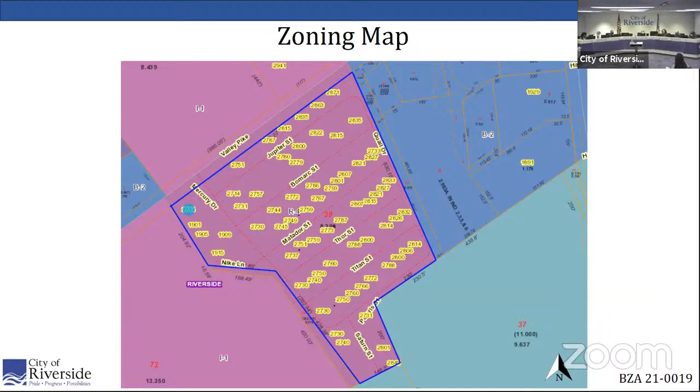This is the zoning map, and this is where the fence will be constructed. It is in the R4 multifamily zoning district. Here is the aerial map. Again, this is where the fence will be constructed. The subject site is in blue.

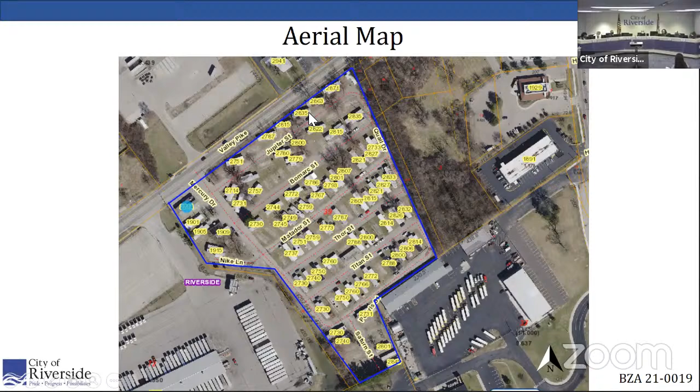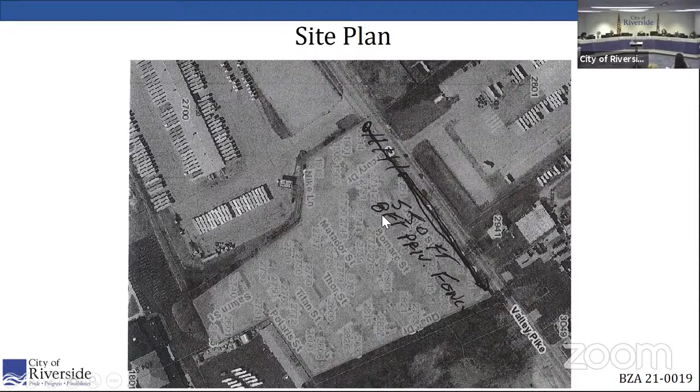The second standard for approval is whether the variance is substantial, and that is yes to both variances. The first variance is a 100% encroachment into the front yard, and the second one is a 166% increase of the permitted fence height.

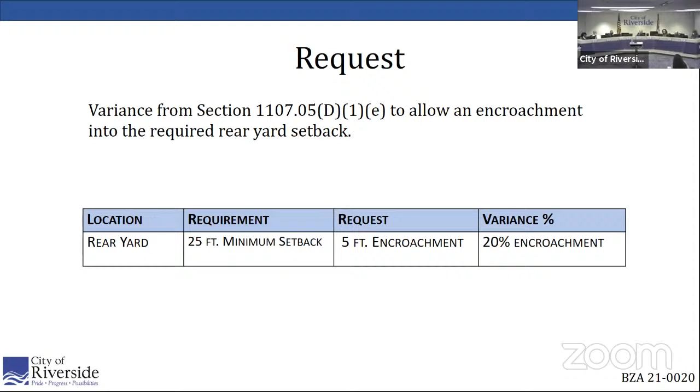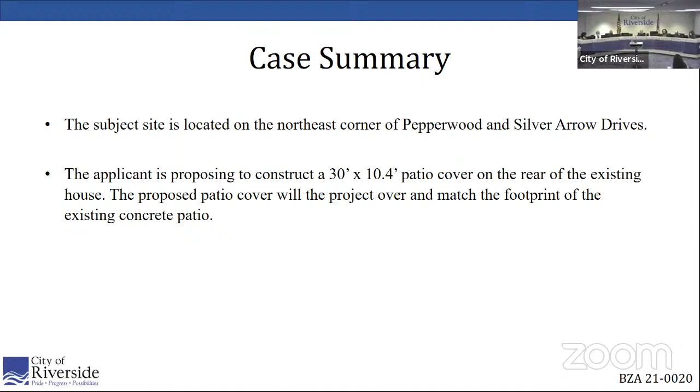We now hear case number BZA 21-0020, Pepperwood variance. City, want to tell us what's going on? This is a variance request from section 1107.05 to allow an encroachment into the required rear yard setback. The requirement is 25 feet, and the request is a 5-foot encroachment. The subject site is located on the corner of Pepperwood and Silver Arrow Drives. They're proposing to construct a patio cover on the existing house. The proposed cover will project over the concrete patio that's already there. Here's the zoning map; it is in the R3 medium density zoning district. The subject site is outlined in blue.

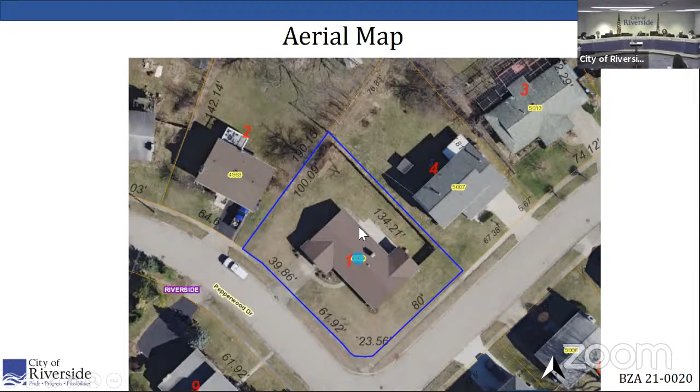Here is the aerial photo of the subject site, and this is where the proposed patio cover will go. This is the site plan. Again, you can see where the proposed patio cover will go in the setback.

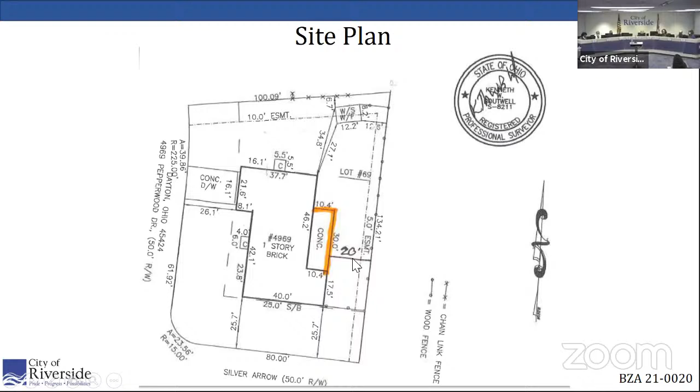The applicant could have beneficial use of the property. However, we acknowledge the property will yield a greater return and more use for the applicant with the patio cover. This is a substantial variance as it is a 20% encroachment.

The character of the neighborhood would not be substantially altered, nor will any other properties suffer any damage as a result of the variance. The delivery of government services will not be impacted by the proposed variance.

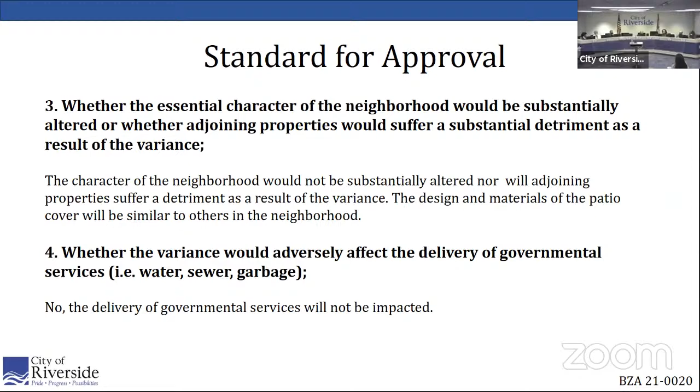Staff does not have enough information regarding the applicant's knowledge at the time the home was purchased. And for the sixth standard for approval, whether the property owner's predicament can be alleviated through some other method, the answer is no. The variance is required to allow the patio cover to match the existing footprint of the patio that's there.

Finally, yes, this variance request does meet the spirit and intent of the code. It's already meeting the required side yard setbacks and will match the existing home and the character of the neighborhood. Staff finds that the requested variance for the rear yard setback is adequately justified and meets the standards for approval, and recommends approval of this variance.

These are your required actions to approve or deny based on the information in the staff report and any testimony and evidence provided today. Again, reminding you of what the variance is being requested. Are there any questions for me?

Okay. At 7:34 we'll open the public portion. Is there anyone here who would like to speak in favor of the application?

I'm Ronald Rybold, the owner of 4969 Pepperwood. I purchased the property, I believe, in April.

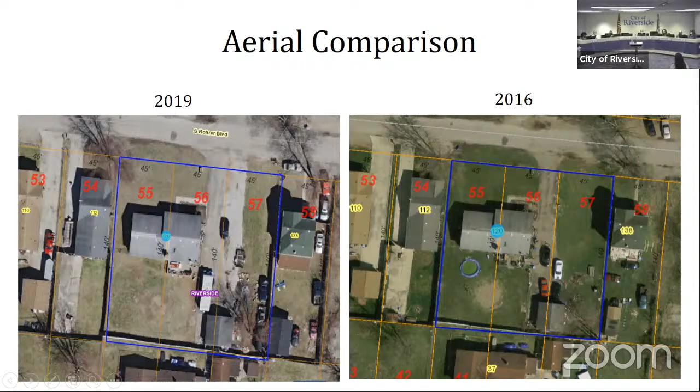Here is the zoning map. The subject site is outlined in blue, and you can see it covers three parcels. They are not combined, and it is in the R3 medium density zoning district. Here is an aerial comparison: the 2019 aerial, the most current one we have, and an aerial from 2016. Here is the site plan that was submitted with the appeal application.

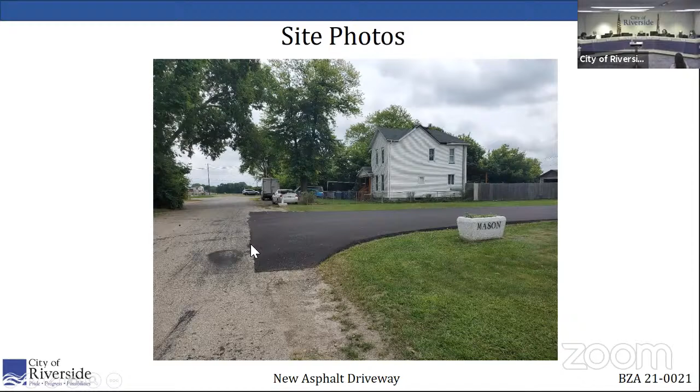This is the site plan that was submitted with the zoning permit. These are the site photos of the front of the subject site. This is the new driveway that was poured. It should be noted that this is where the right-of-way starts, right here. Here's another view of the driveway, a street view from Google 2015, and here is one from our engineering technician on July 6th.

Staff finds that the driveway that was put in exceeds all of the dimension requirements we have in section 1113.13. The maximum width is 30 feet, and when it meets the public right-of-way, it has to narrow down to 24 feet, then it can come back out again in the apron to 30 feet. So it's 30, 24, 30. That driveway is over 33 feet in the right-of-way and on the private property, and the apron is over 51.

The current aerials we have show that there was an expansion between 2016 and 2019, and we don't have any records of a permit when that original expansion happened. So any further expansion loses any non-conforming rights that would have been there on the property.

We find that the applicant knowingly paved the driveway and apron with no valid right-of-way or zoning permit, and they were informed by the service department that the areas marked to be paved were not in compliance. There's sufficient evidence that the applicant knew the driveway was not in compliance and that he completed the work without approved permits. Neither the applicant nor the contractor had received permit approvals for the work done. The service department and zoning staff made the correct decision to deny the permits because the applicant and the contractor knowingly completed the driveway and apron in violation of the UDO.

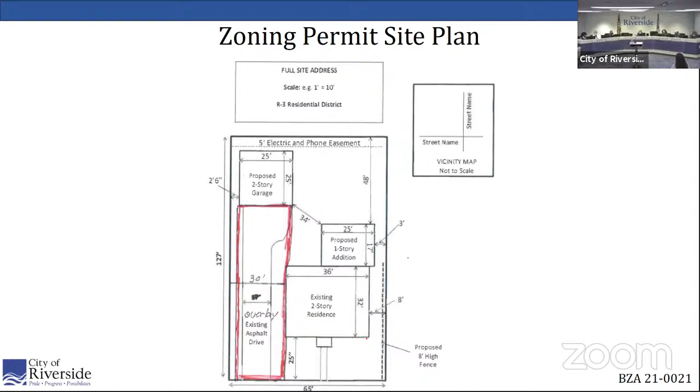Okay, hold on. Is this what you're referring to? Yeah, bring the driveway into compliance. What does that mean?

So when we spoke, a permitted driveway can be 30 feet on private property, and then when it meets the right of way, it can narrow down to 24, and then when it goes to the apron, the maximum width for that is 30 again. So that would be bringing it into compliance.

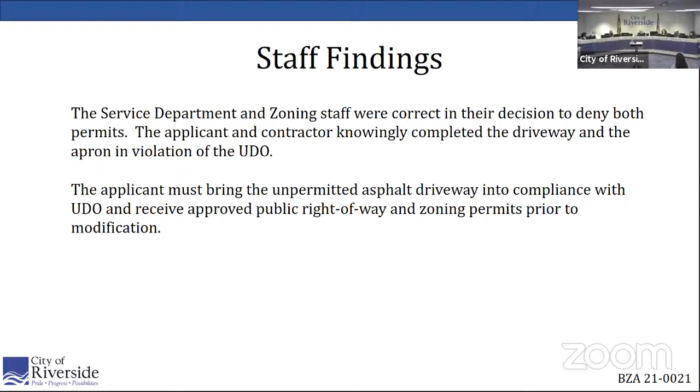Is there an apron? There is. Perhaps you can point that out in one of those photos. So when we say apron, we're talking about this section here. Okay, gotcha.

So what would they have to do? I'm going to refer Mark to this because he sees it. Mr. Chairman, they're telling us what they need to do, but I'm not sure I understand what they need to do.

Mr. Chairman, if we may, could we have both Mr. Lunsford and Mr. Tilley, once we get to the public hearing, answer these questions so that it's part of the public record once we open the hearing? Yeah, that's fine. Is that okay with the board? We'll swear them in at that time, and then any questions, but I'd like them to testify to what is presented in the report.

We'll do that. They can't do that now? No, but we'll get to your answer though. Okay, I'm just trying to understand it. Sure. So do you have any other questions? I think that's enough, at least for now. Everybody else ready? I'm ready. All right.

At 7:48, we'll open the public portion of the hearing. Is there anyone here who'd like to speak in favor of the application?

Hello, I'm Clyde Mason. The testimony I'm about to give to the Board of Zoning Appeals is correct to the best of my knowledge. We assumed the property in 2018 as a purchase by my father-in-law.

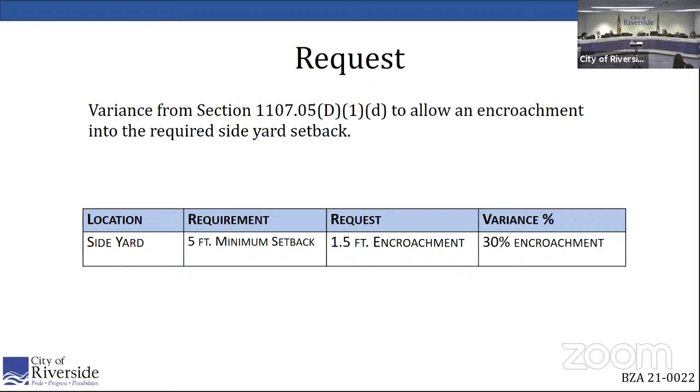So you want to tell us what this is all about? This is a variance request from section 1107.05 to allow an encroachment into the required side yard setback. The requirement is 5 feet. The request is a 1.5 foot encroachment.

The subject site is about 130 feet west of the intersection of Robinwood and Underwood. The applicant is proposing to construct a carport on the west side of their home. It will cover a portion of their rear porch and their existing driveway. Here is the zoning map.

It is in the R3 medium density residential district. You can see it kind of narrows in the blue outlined subject site. Here's the aerial map, and this is where the carport will go.

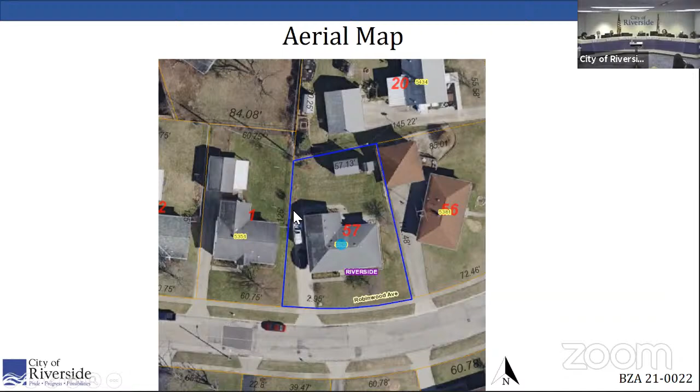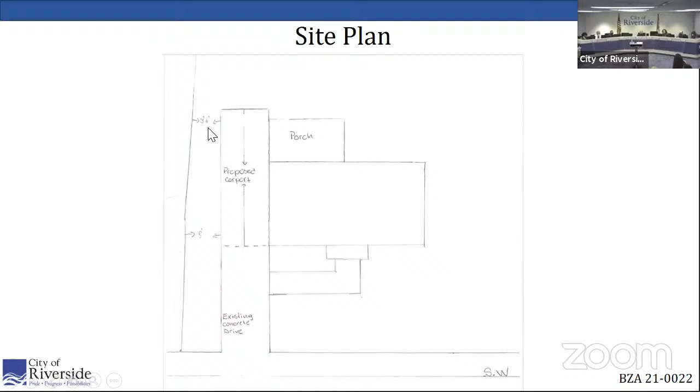This is the site plan for the proposed carport, and this is where the variance request is in the rear of the site. This is the front of the subject site. The adjacent property to the west, right next to where the carport will go. The variance area.

Another view of the variance area, so you can kind of see that rear porch from here where the carport will cover. And just a closer view of the variance area, so you can see this is that side yard that we'll encroach into.

These are some similar structures around the neighborhood. This one is on Logan Street. This is on Wood Hill. And another one, just to give you some of the character of the neighborhood.

Now we get into the standards for approval. The first one, whether it will yield a reasonable return. The applicants could still have a beneficial use of the property, but we do understand and acknowledge the property will yield a greater return and more use for the applicant with the carport. This is a substantial variance, which is the second standard for approval. It's a 30% encroachment.

The essential character of the neighborhood will not be affected, nor will adjoining property owners by this variance. Neither will the delivery of government services be impacted.

Staff does not have enough information about the applicant's knowledge at the time they purchased their home. And no, the variance is the only option they have to build a carport on the lot due to the shape of the lot, as you saw.

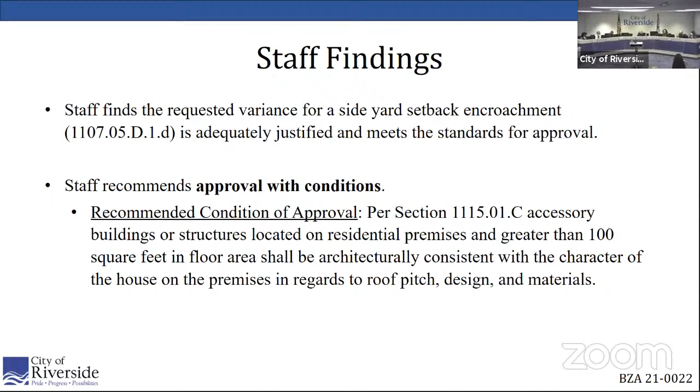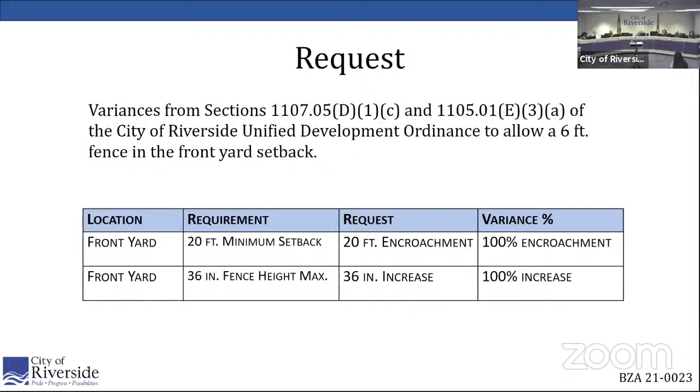This is a request for variance from section 1107.05 and 1105.01 to allow a 6-foot fence in the front yard. The requirement for the front yard is a 20-foot setback. Their encroachment is 20 feet. And the requirement for a fence in the front yard is 36 inches, and they're doubling that, so that is a 100% increase. The subject site is on the intersection of Georgia and Hypatia.

So it's a corner lot, just to be clear. I know you love these. The applicant is proposing to construct a 6-foot fence in the front yard off of Georgia Drive. The proposed fence will enclose slightly more of the yard than the previous fence they have on the site. I'll show you pictures of what's there later in the presentation. And it will be set back from the intersection, not to interfere with any sight triangles for the traffic traveling along those roads.

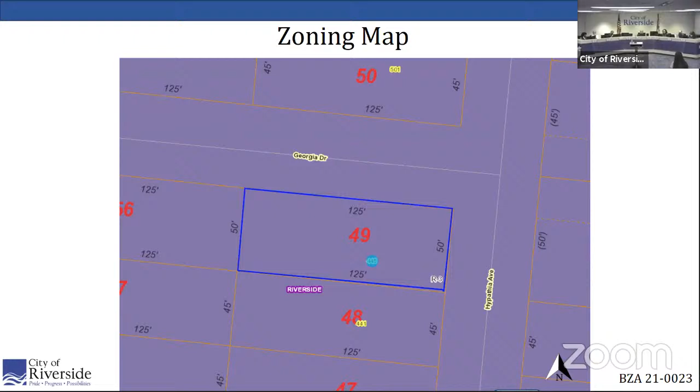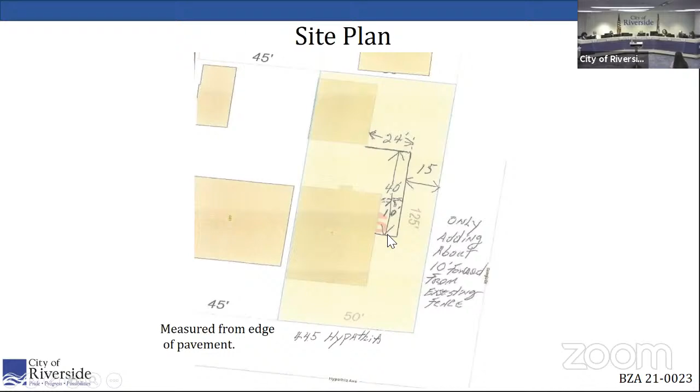Moving on to the standards for approval: whether the property in question will yield a usable return without the variance. There is an above-ground pool on the property, constructed prior to the current zoning regulation. So the variance is required for the applicant to have beneficial use of the property and observe the fence regulations.

Whether the variance is substantial, that is yes to both. It's 100% encroachment on Georgia Drive, and also the doubling of the fence height from 3 feet to 6 feet. The essential character of the neighborhood will not be changed, nor will it impact other properties. It will be out of the sight triangle.

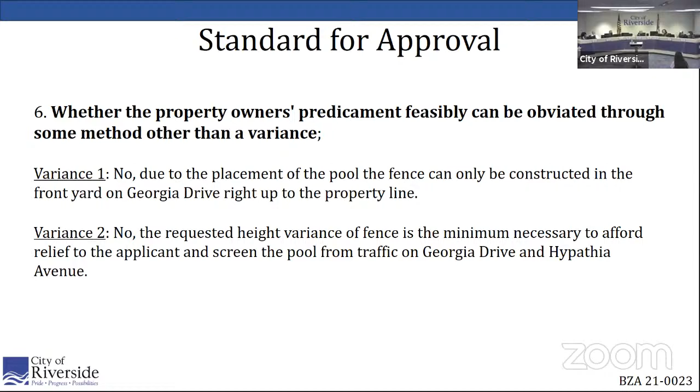Whether it would meet the spirit and intent of the code: yes. As I mentioned before, they've forfeited their rights for nonconformance, and they're building a fence because the pool does have to be screened. They're doing that to comply with those regulations.

Staff does recommend approval for the front yard setback and finds that it is adequately justified and meets the standards for approval. We recommend it with conditions, just to make sure they know to construct the fence out of the public right of way, because it's right there and they have some other items there. We just want to put that condition in so they know.

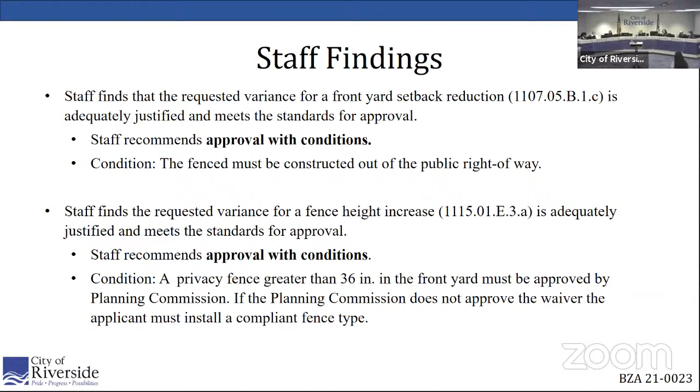And the second variance, for the fence height increase, like the other one we had before, we're approving it with conditions that it goes to the planning commission for the waiver. The required actions are to approve or deny based on the information in the staff report and any testimony or evidence provided at this public hearing today.

Are there any questions for me? No. Okay.

8:33, I'll call the public portion of the hearing. Anyone here like to speak in favor of the application? You sat there all night long to say that, didn't you? Finally.

Tamara Allison. I affirm the testimony I'm about to give before the Board of Zoning Appeals is correct to the best of my knowledge. I've owned the house for 22 and a half years. I've had a fence the whole time. I have custody of 2 children that aren't mine. They're really good, straight-A students with special needs. I have a pool and hot tub in the backyard for them to stay home.

I want the neighborhood kids to come to our house so I know what my kids are doing. I have custody of my niece, and I'm trying to make the fence bigger because we have a window in the basement where you can see it's going to go to the side of the picture window. I'm trying to cover that up because somebody tried to get in, and she has terrible anxiety because her mom has broken into her house.

I've had her arrested 18 times. I don't ever call the police. She just got out of prison after 2 years of being in prison. She just got out Friday. So my niece has terrible anxiety, she locks herself in her bedroom.

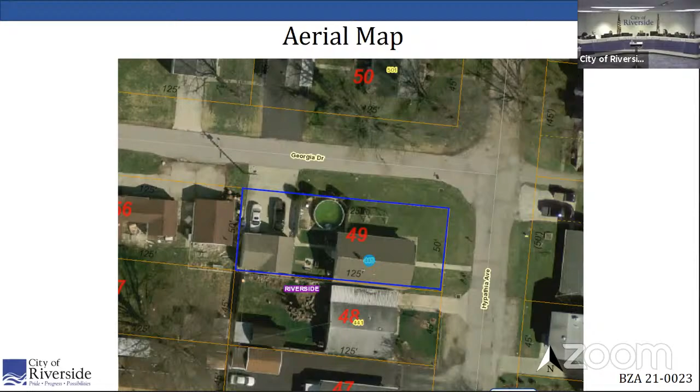So we'll call it, there's no one else here. At 8:39 we'll call the public portion to an end. You guys have a problem? All right.

Then we'll read our findings. We found that the Riverside zoning ordinance was passed into law after rigorous procedure was followed. Therefore, we begin our inquiry with the presumption that law should be upheld without a variance, and the burden is on the appellant to show by convincing evidence that the code should be varied regardless of how large or how small the variance may be.

We found that a variance is required to have a beneficial use of the property; an above-ground pool was constructed on the property prior to the current zoning regulations. We found that the variance is substantial. The request is 100% encroachment into the front yard. The essential character of the neighborhood would not be altered, nor would adjoining properties suffer any detriment.

The applicant's predicament cannot be obviated through some method other than a variance due to the placement of the pool and the fence. The fence can only be constructed in the front yard on Georgia Drive right up to the property line. We find the spirit and intent behind the zoning ordinance would be observed by granting the variance. The applicant has forfeited their non-conforming rights and is requesting a variance to construct a fence which would comply with pool regulations. We also take into consideration that the zoning staff recommends approving the variance as requested with conditions.

We find that the applicant has met the burden of showing practical difficulties for the variance and front yard setback requirement. Therefore, I make a motion that the variance be granted as requested with the condition that the proposed fence must be constructed out of the public right of way.